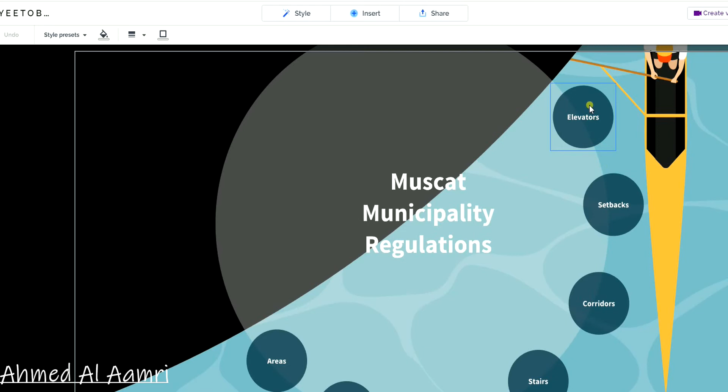So we are going to tackle 7 areas or topics: areas, doors, height, stairs, corridors, setbacks, and elevators. What are the regulations or standards that we are using to obtain our area, and on what basis do I say a room is going to be 10 by 10 or 1 by 2? There is a standard I need to follow for doors, height, stairs, corridors, setbacks, and elevators as well.

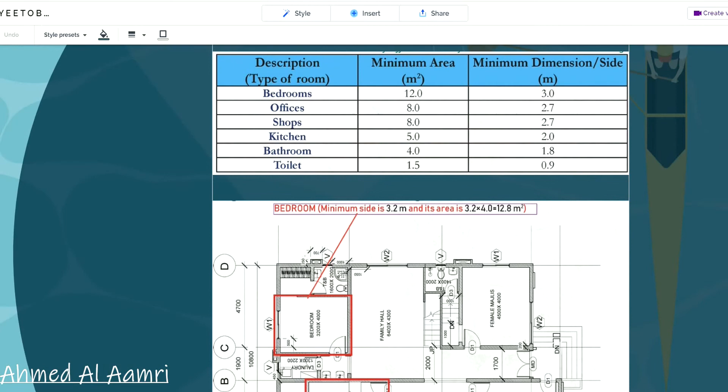Okay, so when it comes to areas, two things are there. This is the municipality, and this is from my own book, but this is a representation of the municipality. You can see it gives a description of a room, the minimum area, and a minimum dimension or side. According to Muscat municipality, the bedroom should have a minimum area of 12 meters and a minimum dimension or side of 3 meters.

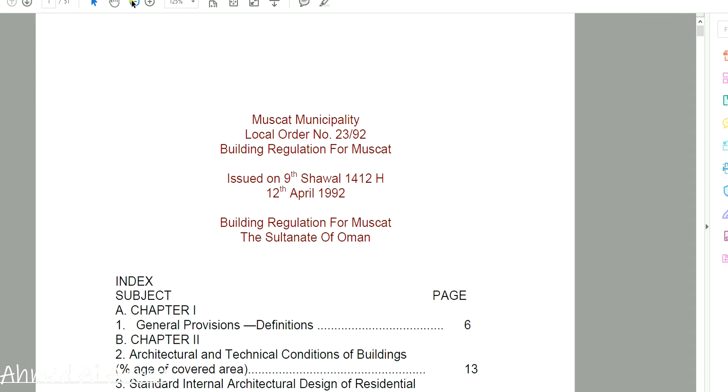And if you go and see the municipality building regulation - this is a building regulation, unfortunately from 1992, it's very old, that's the only thing we have - you can see the bedroom is having a minimum area of something and then the least dimension of something. We need to understand what's the meaning of these things.

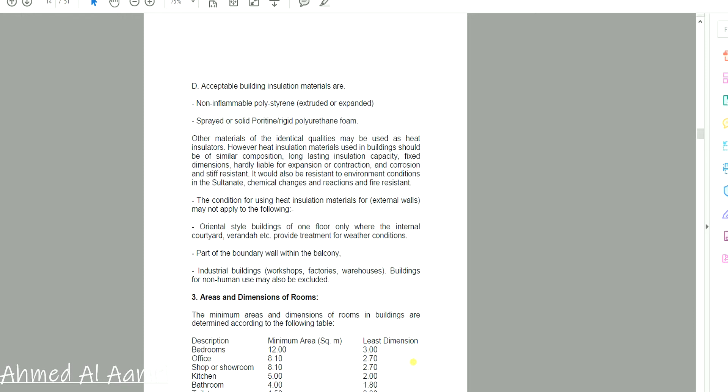So when it comes to minimum area, any bedroom in my plan which has an area lesser than 12 meters, the municipality is not going to approve the plan and will ask you to modify it. For minimum dimension, normally we have four sides, and we need to ensure that none of these four are having a value lesser than 3.

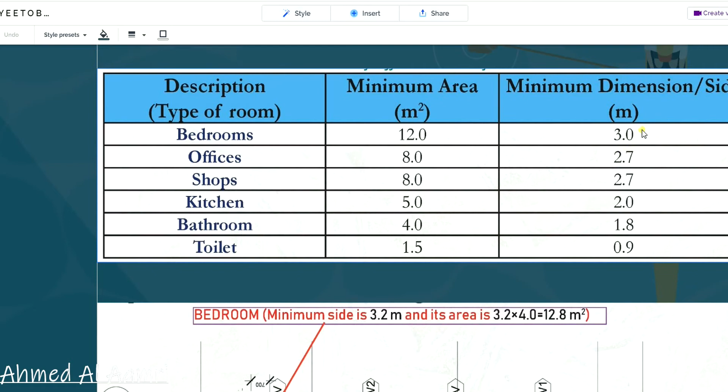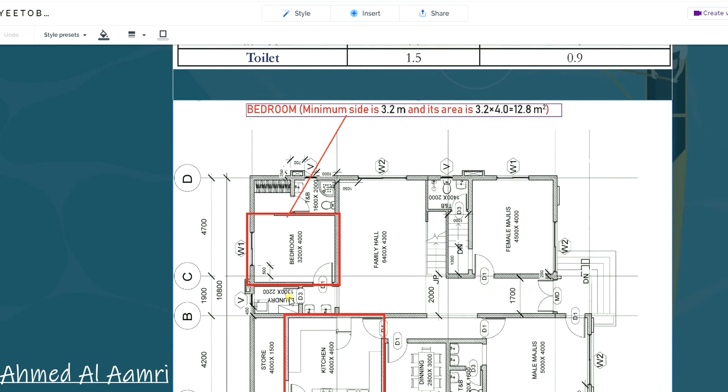So for example, let's take this particular example. Now we have a bedroom in this particular plan, and we are going to verify whether it's according to the law or not. You should be using these dimensions before, not for verification purposes, but just to highlight. So we have a bedroom of 3.2 by 4 meters, and 3.2 by 4 meters is the inner area - not center to center, it's the inner area. So 3.2 is more than the minimum.

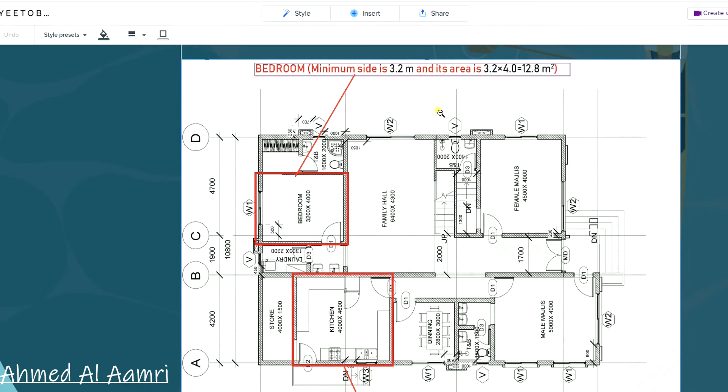Okay, this is more than the minimum, which is 3. So we have a minimum of 3. This bedroom is 3.2, and the area specified is 12. If we multiply 3.2 by 4, we get 12.8.

So for this particular bedroom, I have satisfied whatever is available in the municipality. Later on, when you work as a consultant, you don't want to get your drawings returned back a lot from the municipality. So you need to understand the regulations given by the municipality, and accordingly build your own drawings.

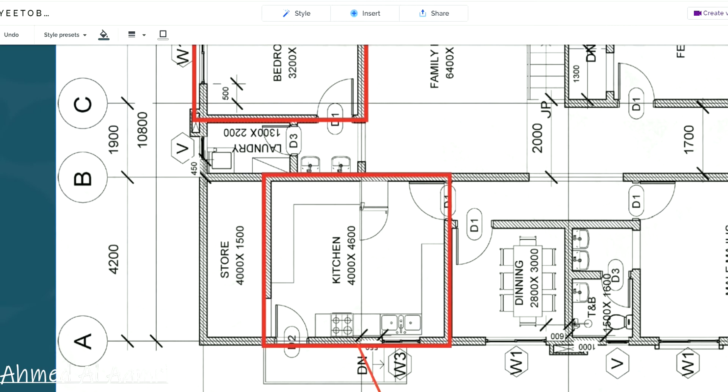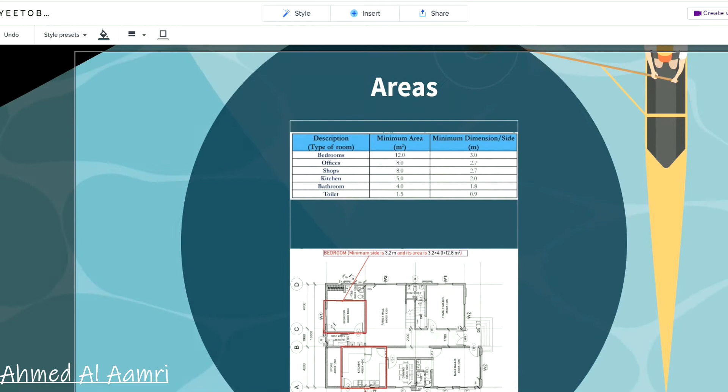The same thing applies for the kitchen. Let's say this kitchen has a dimension of 4 by 4.6. According to the municipality, the minimum area for a kitchen is 5, while the minimum dimension or side is 2 meters. Now 4 meters and 4.6 are more than 2 meters, so we don't have any issue related to the minimum dimension, and we don't have any issue related to the minimum area, since our area is around 18.4. So this is one of the things we need to know from the municipality regulations.

Another thing we need to check from the municipality regulations is what we call doors. Even though it's more of an architectural thing, you need to know it a lot, because many structural things depend on the doors. The positioning of the columns -- you cannot position a column in the middle of a door. So you need to know what the sizes of the doors are, and whether we have the same size of door for all the rooms.

If you notice, when it comes to the toilet or bathrooms, we always have a lesser area. The minimum width according to the municipality for the door is 0.75, and the minimum height of the door is normally 2.1 for any type of door. Normally we start from 0.9. It's a regular value in most buildings -- it goes up for the entrance, and lesser for the bathroom. Now let's look at certain examples we've taken here.

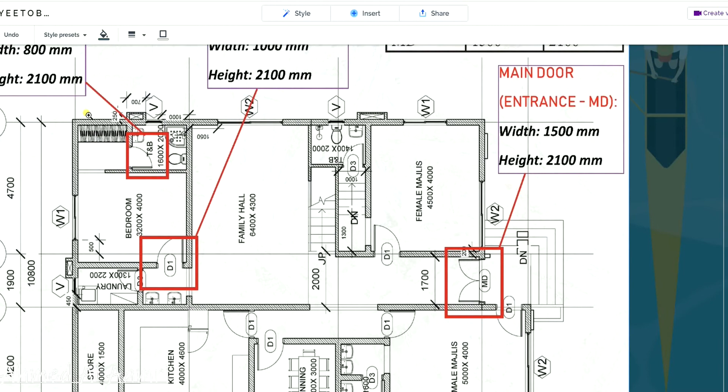We've taken three examples to highlight this, and once again, if you follow the municipality regulations, your drawings will not get returned back. So this is MD, representing main door -- you can see the main door here. The width of the main door is 1.5, while the height is 2.1. So I fulfilled the municipality requirement, because the municipality says the height should be 2.1, and the minimum width for the entrance or main door is 1 meter. I provided 1.5 meters.

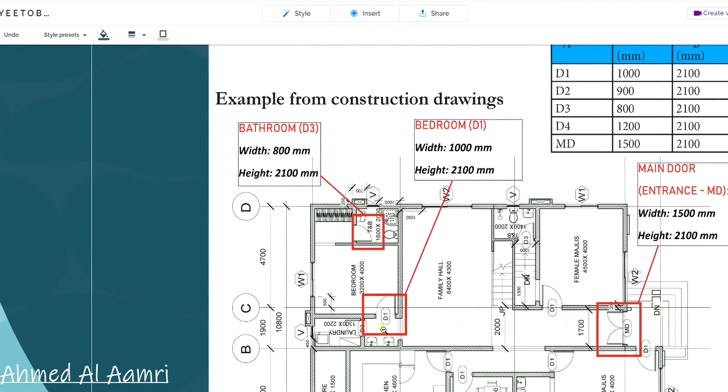Now when it comes to the bedroom, the municipality says a minimum width of 0.9 and a height of 2.1. You can see here, according to D1 in the legend, a width of 1 meter is used with a height of 2.1. The width is more than the required 0.9, and the height is 2.1. You'll notice we always use a height of 2.1, so if anyone asks you in an interview what's the typical height of a door, you should know it's 2.1. You shouldn't say it's an architectural thing you don't need to know -- no, you should know it.

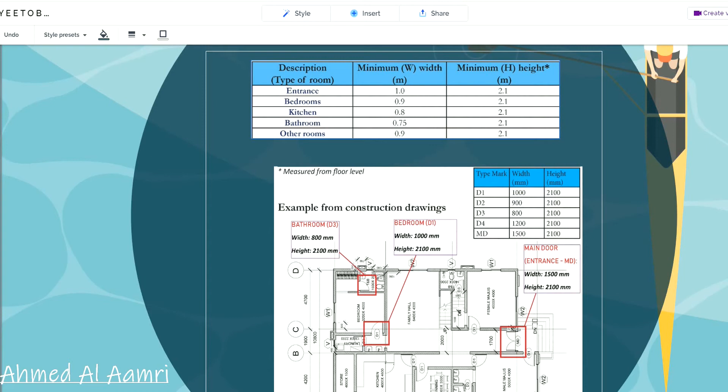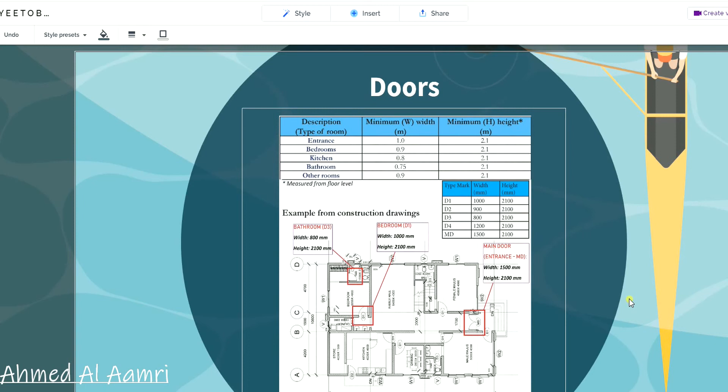Same thing for the bathroom. For the bathroom, we use a width of 800 with a height of 2.1, and here for the bathroom it's 0.75 by 2.1. So according to whatever regulations are given by the municipality, you need to work your drawings accordingly. Normally we don't do this kind of verification -- this is just to show you how to use these values. Normally we build our own drawings according to whatever is available in the regulations.

Normally this will be done by the architect first, and then it will be brought to the civil engineer. But in a lot of scenarios, you might not have an architect to check for you, so you need to know the basic things available in construction drawings.

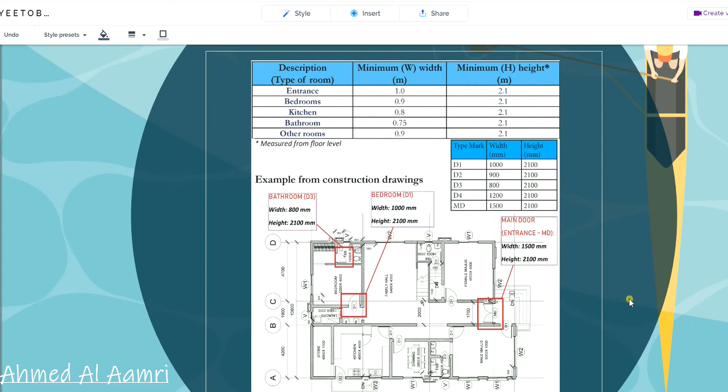Heights. Now we are talking about the different heights, and this is very important for you when it comes to structural design. A lot of architectural students here in the college, a lot of students in the project, they are using heights without knowing from where they have got that height, or from where they are going to say or justify that they have used that height.

According to the municipality, if we are having a residential building, if it's a one-story building, or if it's a ground floor, we can go for 3 meter up to 4 meter. I cannot go and have 4.2 meter for a single story building, or even if it's a ground floor. It should be from 3 to 4 meter. I should not exceed that value, and I should not be lesser than 3 meter.

Lesser than 3 meter, it means because of the slab, because of the beams. Once again, the height is measured from the slab to the upper slab. So it means that you need to reduce the slab thickness, you need to reduce the beam thickness. It means that you have a very small clear height. You will end up having around 2 meter or 1.8 meter that you cannot use if you are using something lesser than 3 meter.

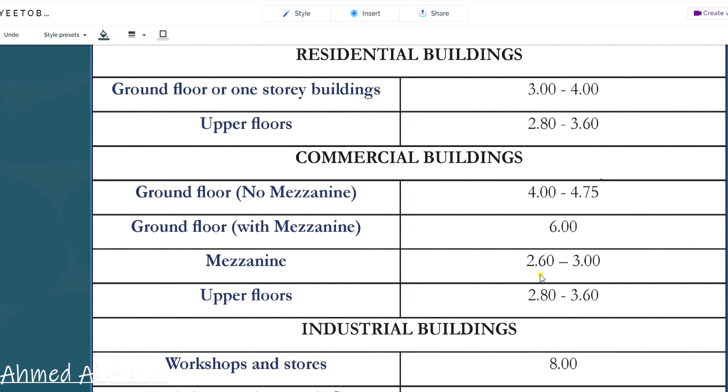For commercial building, we have ground floor with two options: one with mezzanine, another one without mezzanine. If it's with mezzanine, then it's going to be 6 meter, mezzanine included. If it's without mezzanine, only ground floor and then first floor directly, then you're going to have it from 4 to 4.75. Mezzanine, if it's separate, 2.6 to 3 meter. It should not exceed that.

Upper floor, if you're going to use, I mean first floor, second floor, third floor, typical floors are going to be from 2.8 to 3.6.

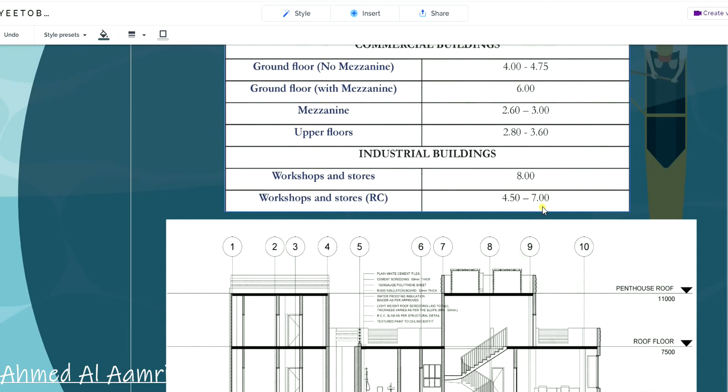In case of industrial buildings, if you are talking about a workshop, if it's a steel structure, then you need to go for up to 8 meter. You cannot go more than 8 meter. If it's an RC structure, it's from 4.5 to 7 meter. You cannot exceed 7 meter. And once again, workshop for RC is not recommended. Normally we have

most of the structures for the workshop, most of them are going to be steel structure only. And one information when it comes to steel structure: all the consultancies here in Oman, they are doing only concrete work.

They are only doing concrete design, they don't do steel design. Even if you take it done by your consultancy and take it to the municipality, the municipality will not approve it. The municipality will ask you to take it to a manufacturer or a contractor, a steel contractor or a steel subcontractor who is going to do the design. So the design of steel here in Oman is done by the steel company, not by the consultancies.

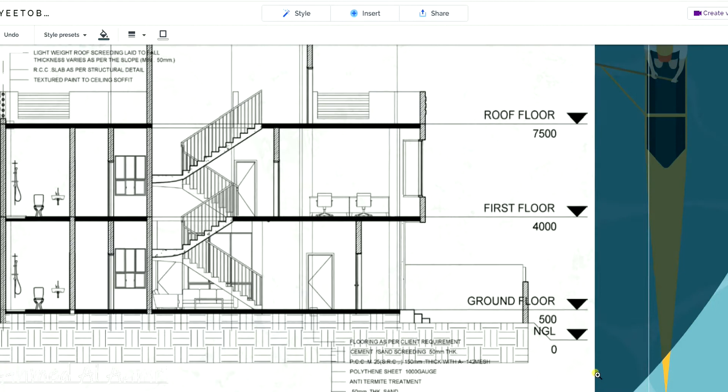The consultancies are doing concrete design or pre-stressed concrete as well. Now you can see here we have natural ground level, ground floor, and then from the ground floor to the first floor we are having 4 meter.

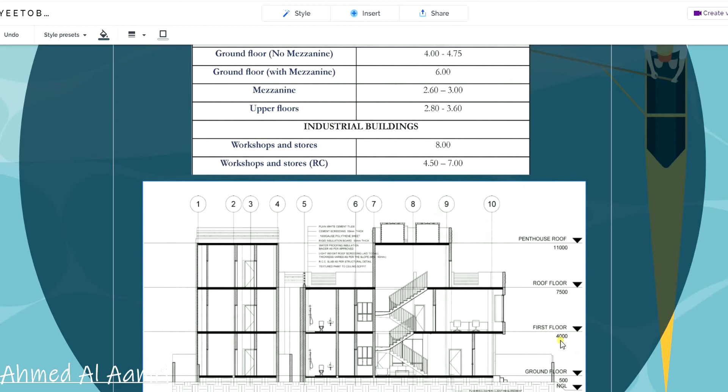So this is fulfilling whatever is available. Of course, this is a residential building. For a residential building, according to the municipality, we should not exceed 4 meter. So we have the ground floor for up to 4 meter. The roof floor, so the second floor, is going to be 7.5 minus 4, which is 3.5. So once again, 3.5 is within the limit specified by the municipality, and it goes the same for the roof.

So first floor and then the roof floor. Once again, it's very important for me as a civil engineer to know if I'm going to design a warehouse, what's the maximum height that I can go for. If I'm going to design a commercial building, what's the height, and then for a residential building, what's the height to be used.

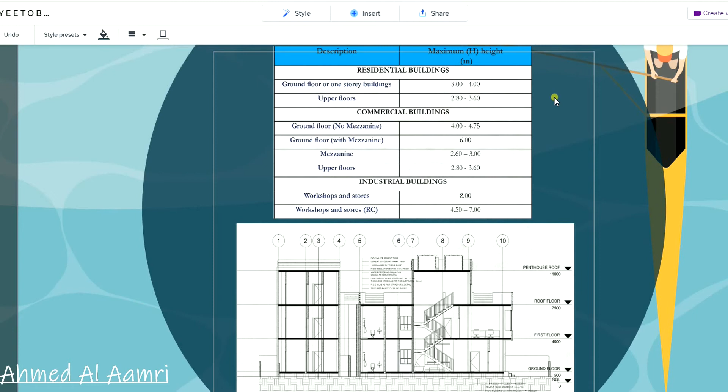Okay, going for the next point, which is stairs. A lot of things are here. We are going to first understand the concept of stairs.

I don't think that you have taken anything related to stairs in your college studies. You need to understand them. So we have different components of stairs. We have something called rise, and we have something called going or tread. Okay, so rise and going, different terminologies. The thickness of the slab for the stair, we call it as a waist. Okay, so the thickness of the slab for the stair, we call it as a waist.

We have a landing here. It can be supported by beams or it can be supported by walls. So one beam here, another beam here, or it can be supported by wall on this particular side. Okay. Now, why this is very important for me, because there are certain things that I need to follow according to the municipality. One of them is the number of rise or the number of steps in the stair. Another thing is height of the rise. Another thing is width of the going.

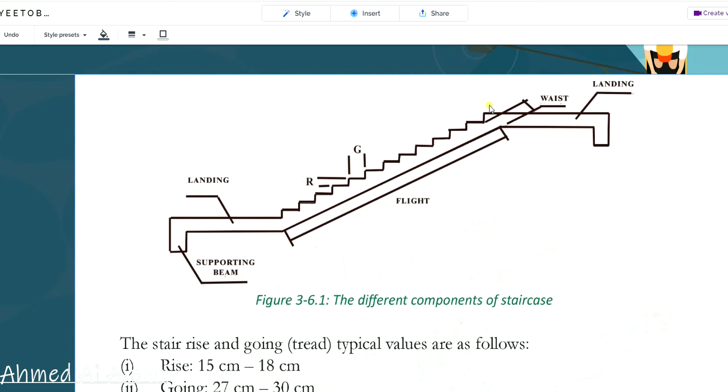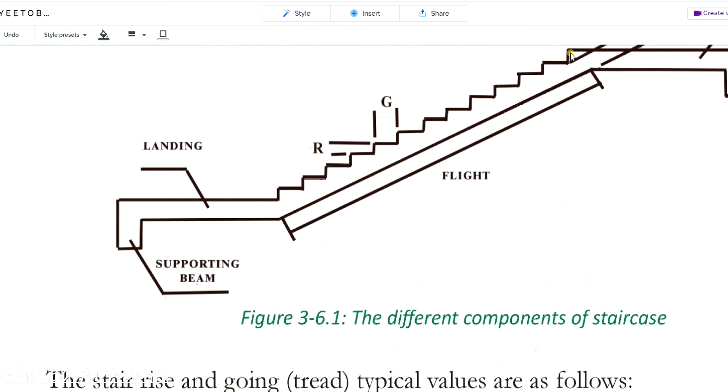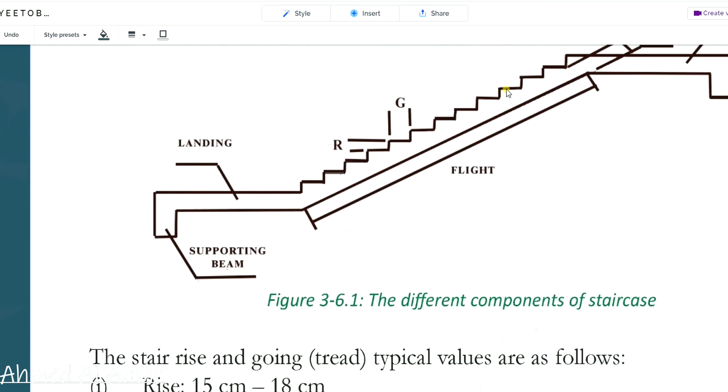Okay. Now if you go and notice here, and this is a very important question normally asked in the interviews: what's the relation of the number of risers to the number of treads? If you can see here, we have first riser, second riser, third, fourth, fifth, sixth, seventh, eighth, ninth, 10th, 11th, 12th, and then 13th. We have 13 risers. How many goings are there? First going, second going, third, fourth, fifth, sixth, seventh, eighth, ninth, 10th, 11th, 12th. The last one is not considered to be a going anymore. It's considered to be a landing.

So if they are asking you what's the relation of risers to goings, you can say that the number of risers is always going to be the number of goings plus one. Okay, so always the number of risers is more than the number of goings by one. Why? Because the last one is not considered to be a going; it's considered to be a landing.

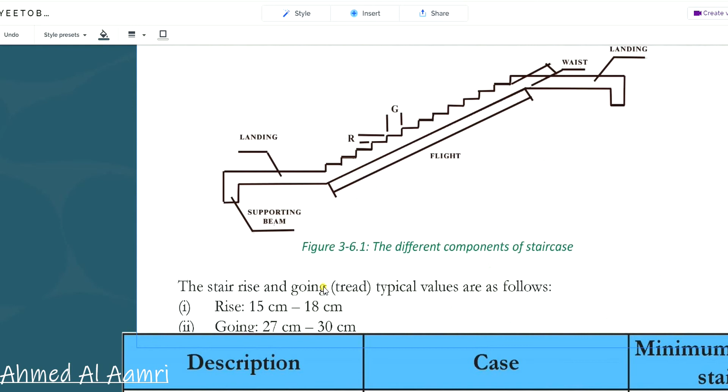Okay. Now, according to the municipality, there are certain things that you need to follow. We need to have the height of the riser to be within 15 to 18 centimeters. It shouldn't be less than 15. It shouldn't be more than 18. Being more than 18, it's too much. You will feel that it's hard to use this particular stair because it's not easily used. And the going is going to be between 27 to 30. If the municipality gets your stairs and you are not within these limits, your full drawing is going to be returned back, and you will be asked to change it.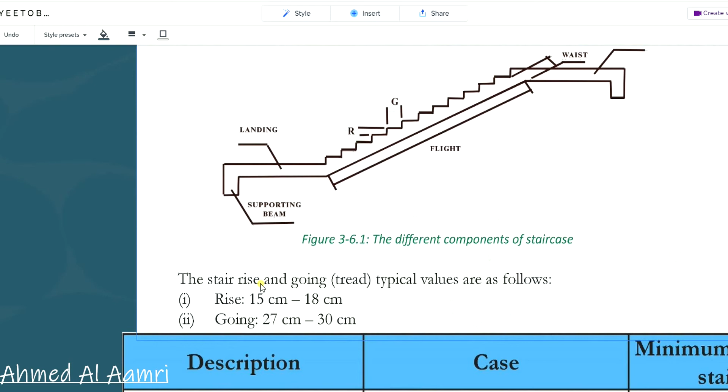Now, if you keep making a lot of mistakes and sending them to the municipality each time, or if they see very huge or basic mistakes like these ones, normally they will cancel whatever you have submitted, and then you need to pay for the second one. For each time that you send your request, you need to pay around 20 riyals. So they will cancel it, and then you need to pay. If they keep seeing a lot of issues coming from your side as a consultant, then they might decide to cancel your consultancy.

Okay. Anyhow, the second point is going to be about the number of staircases in a building. Once again, the municipality has specified, if you have a single floor, you can have either none or one. There is no specification related to single floor. If I have a single floor, either it's going to be none, I don't have any stair, to go to the roof you can have an outside stair, or you can have one. Now, if it's more than a single floor, at least you have one.

Now, when to say that I need to have two? I need to have more than one in case I have a floor area more than 500, or a total built-up area more than 1,500. So let's say I have a block where the floor area is 600. I have two stories, 600 for the ground floor, 600 for the first floor. Then one is not going to be enough for me. Okay, one stair is not going to be enough.

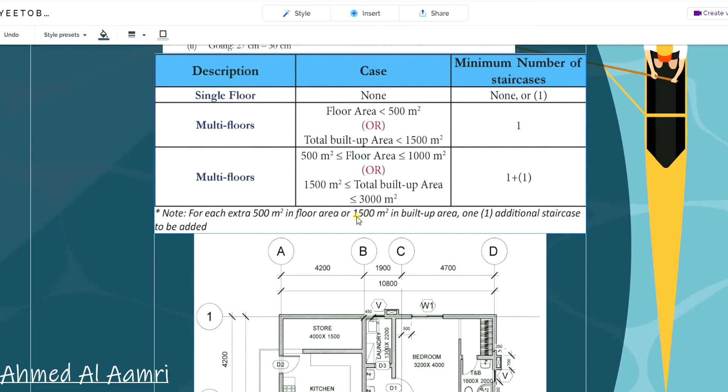Let's say, for example, I have a floor area of 1500. It means that I'll have one for the first 500, a second one for the second 500, and a third one for the third 500. So I'll be having three stairs, and it goes on. Okay. Now that's related to the number of stairs. After that, we are going to see the width of the stair.

So first we discussed the different components of the stairs. We learned the meaning of riser, going, tread, waist, landing. We learned on what basis we specify whether I have one stair or two stairs. After that, we are going to see on what basis I determine the width of the stair.

So it says, if it's a residential building, and you are talking about three units in a floor, let's say three apartments, since it's residential. So 3 apartments in one floor, 12 apartments in all floors. Then the width is going to be between 1 to 1.1.

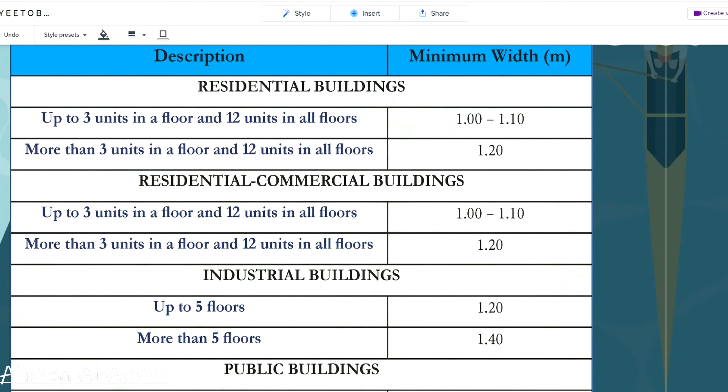So one basic thing that we should know: it depends on the number of units and the number of people using the building to decide how many stairs and what the width of the stair is. And these are examples. For example here, you can see the floor dimensions, this is 10.8 and this is 16.7. Your area is around 150 to 200, less than 500 meters square. So for this particular building, I don't require more than one stair, because if it's less than 500, one stair is going to be sufficient.

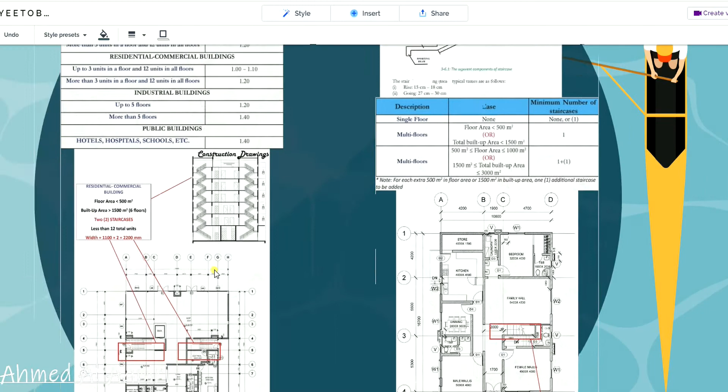So once again, if it's less than 500, then one stair is going to be sufficient. What's the width of the stair? The width of the stair is given to be 1000. So 1000 here, another 1000 here, which follows the width shown in the municipality requirements. Another case is here. You can see that I have ground, first, second, third, fourth, fifth, sixth, and it goes on.

You can see here 6 floors are there. Floor area is more than 500, or total built up area. Okay, floor area is lesser than 500, but total built up area is more than 1500 because it's 6 floors. Total built up area is the addition of all floors together. Since it's 6 floors, it means that the number of users are going to be more. So one stair is not going to be sufficient. I need to use 2 stairs in this particular example.

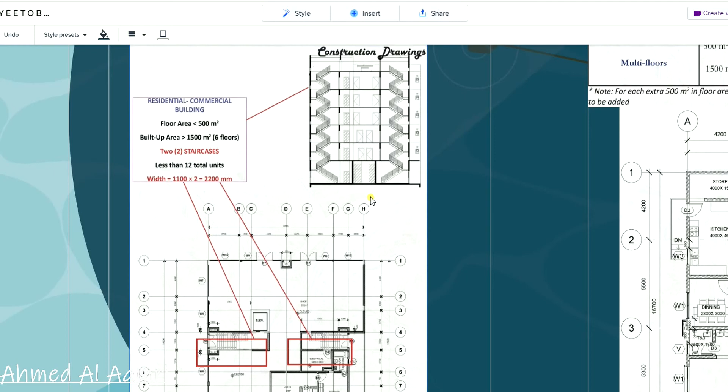What's the width of the stair? It depends on the nature of the building, whether it's residential, commercial, industrial, or public building. So once again, we need to know first what's the floor area, what's the built up area, and accordingly we are going to specify the number of stairs. After specifying the number of stairs, we need to see the nature of the building, whether it's residential, commercial, industrial, or public, to decide the width.

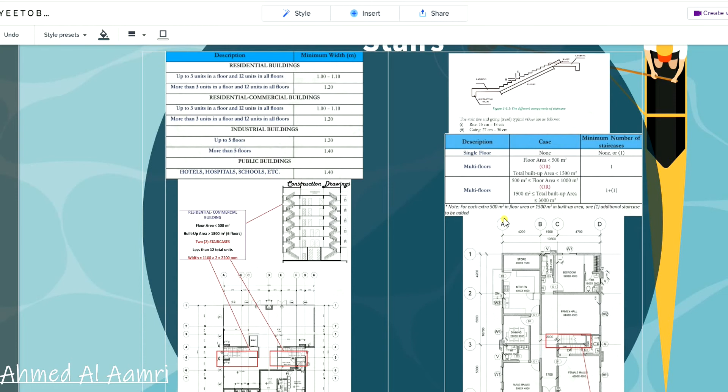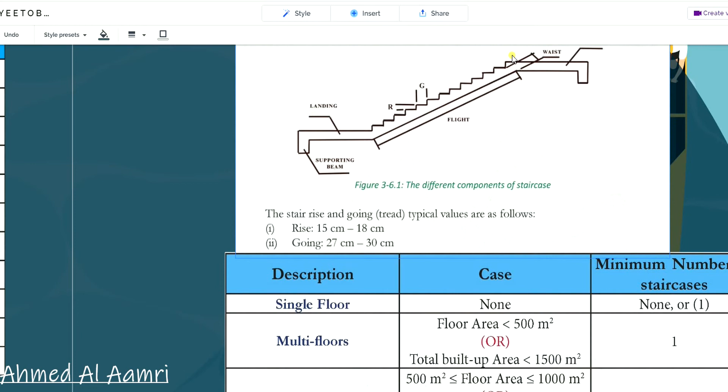Okay, and once again, there is one thing that you need to note. One question might be coming for you: what's the maximum number of steps for a stair? One line stair, it's going to be 13. You cannot have more than 13 according to the municipality. If you go more than 13, then your design is going to be returned back. Okay.

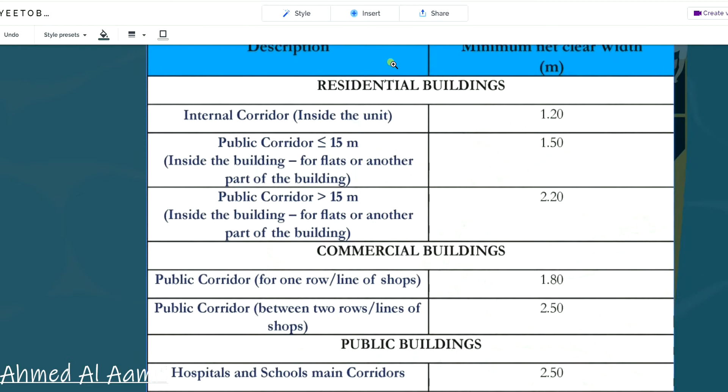After that, we are going to go for the corridors. And once again, I need to know what are the specifications from the municipality related to corridors. For residential, we have internal corridor, we have a public corridor, and then we have commercial buildings, public buildings. It depends on the number of users. Residential, normally the number of users are less, so the width is going to be less. Commercial, number of users is more, so normally the width is more. Public, a lot of users, so normally the width is going to be more.

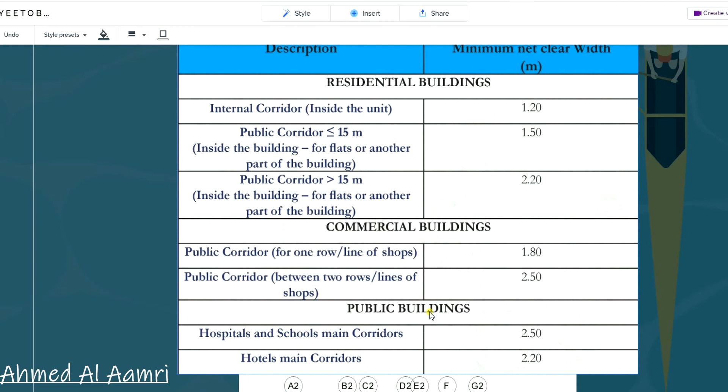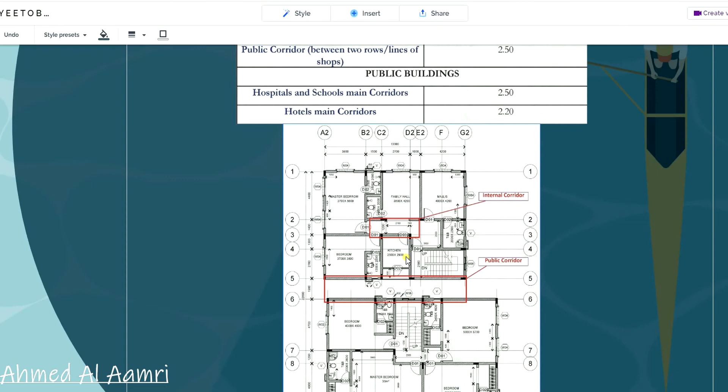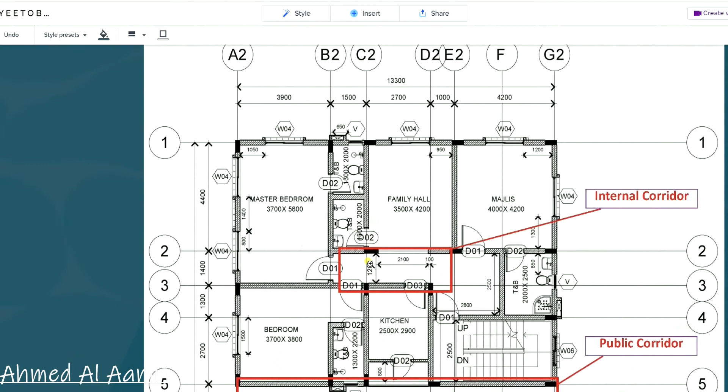Internal corridor is between the rooms themselves. Is it clear? So internal corridor is inside the entity. Public corridor is between the entities. So normally when it comes to a regular plot, we are dealing more with internal corridor. So according to the internal corridor, you need to see how much. Here, for example, it's 1.2. You can see internal corridor inside the unit, it's 1.2.

Okay, so that's related to corridors. You need to understand the meaning of internal corridor, public corridor, and you need to understand the nature of the building, and accordingly you can specify the width of the corridor itself.

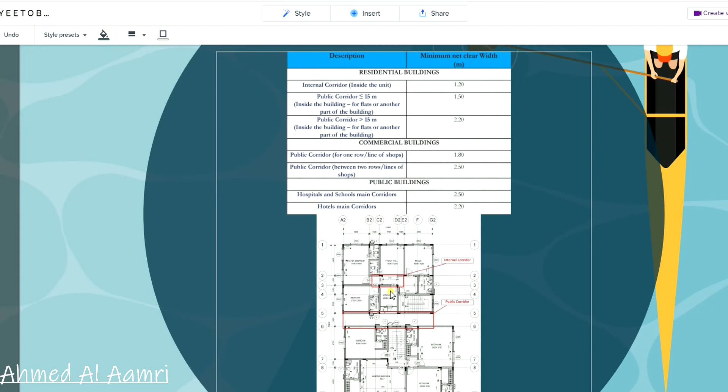Setbacks, this is a very important point for tomorrow's lecture, which is croquis. So we are going to learn how to read the croquis tomorrow. Now, according to the municipality, there are certain clarifications for setbacks.

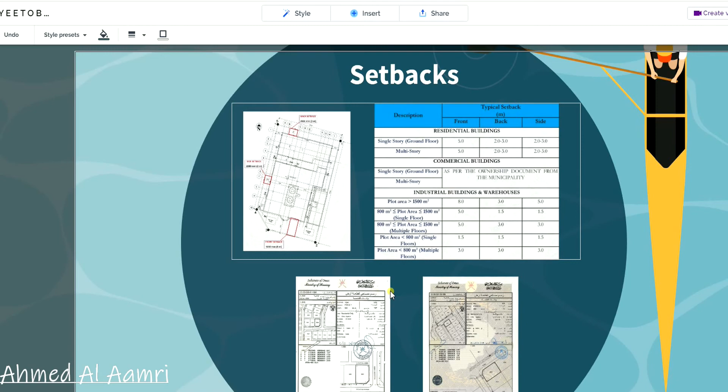الارتداد, or setback, is from the structure itself till the last part of your boundary wall. Okay, so certain things have been given by the municipality. For example, it gives you typical setbacks. You can see here we have different setbacks.

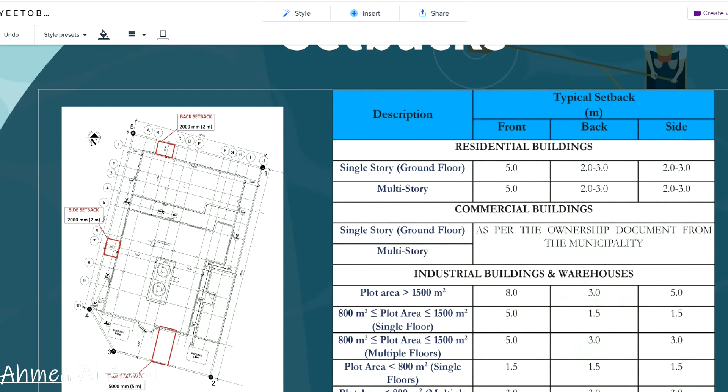This is back setback. These are sides. This is first side. This is second side. And then we have here front setback. So these are the setbacks, أو الارتدادات.

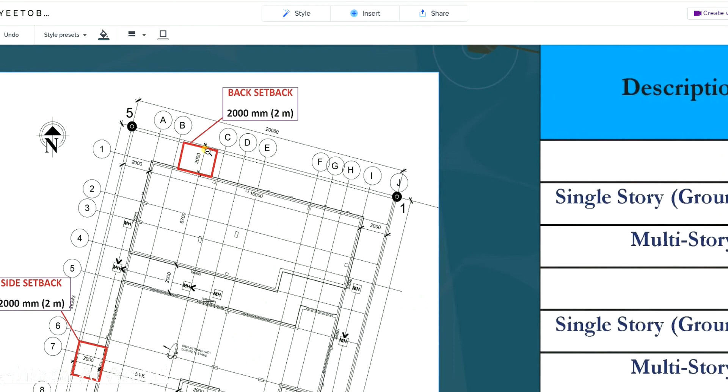Okay, and you can see here in this particular example, the back setback is 2 meter, the side setback is 2 meter, and then the front setback is 5 meter here. Okay, so it means that we have fulfilled, if this is a residential building, the 2 meter for the back, the 2 meter for the side, and then 5 meter for the front.

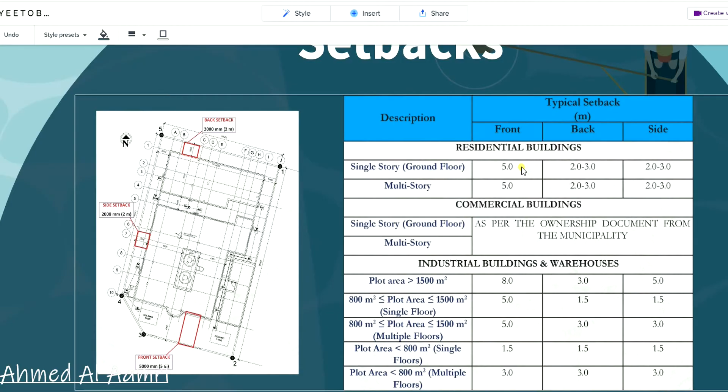Normally there might be a clash with the croquis. Whatever you need to follow here in terms of the setbacks, your final reference is going to be the croquis. It's not going to be the ministry. There might be a small change between them, but your final decision as a designer is going to be based on the croquis itself. So if we go for the croquis, these are two samples of croquis. You can see area, number. We are going to discuss it in details next session or tomorrow.

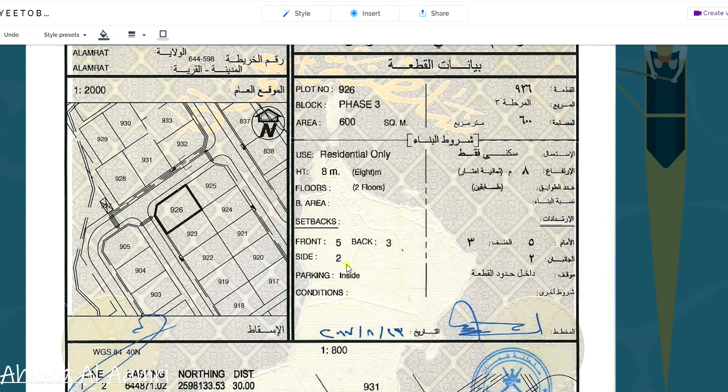And now you can see that they have mentioned clearly the setback. It says for you for the front 5 meter, for the back 3 meter, for the side 2 meter. It means here I cannot go from 2 to 3 meter for the side. I cannot go for 3 meter. Even the municipality says 2 to 3, but according to the croquis, I have only two. So the final reference is going to be the croquis.

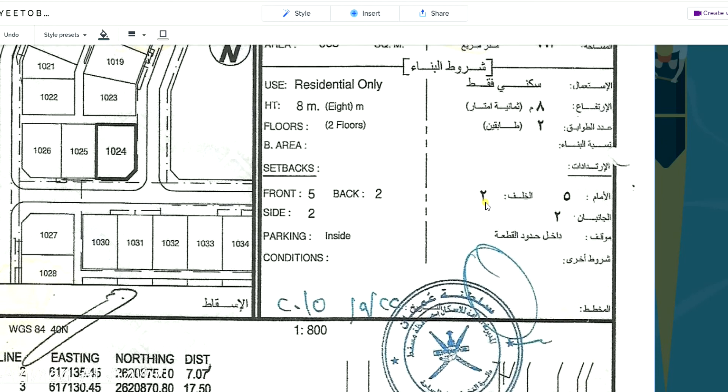Okay, and then the second one is this one, and once again here you can see 5 meter, 2 meter for the back, 2 meter for the side. The parking is inside, if you can see, that's why we are giving them 5 meter for the front. I cannot go and use three even if the municipality says it's 2 to 3, because the final decision is going to be according to the croquis.

Tomorrow we are going to learn the different things in the croquis. We are going to learn easting and northing. We are going to learn how to plot the plot in AutoCAD, how to find it in Google Maps, because Google Maps is using a different system of coordinates, and AutoCAD is using a different system for coordinates. So if somebody is asking you to draw the plot in the CAD, you should know how to draw it. If somebody is asking you to find this particular plot according to Google Maps, you should know as well.

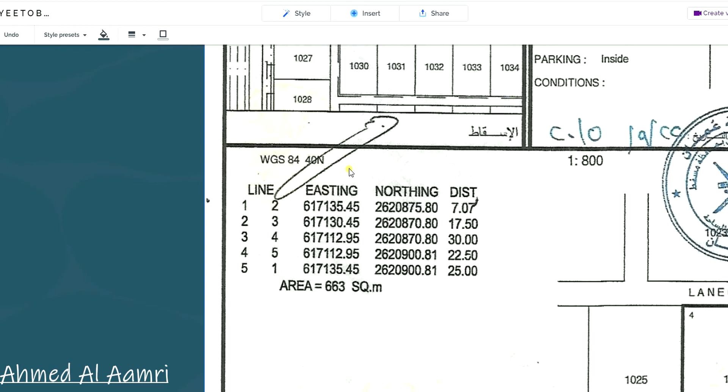Last thing, we are going to go for the elevators. And elevators normally, according to the municipality, can be available in a building if it's more than 3 stories. Okay, if it's 3 stories or lesser, then it's optional. It depends on the owner of the building. If the owner of the building is having a good amount of money, and he is having 2 stories, and he wants to have a lift, that's up to him.

The main functions of the elevator or the lift are two. One is for the ease of transfer vertically from one floor to another floor. Second thing is to resist the horizontal forces. That's the main thing for you as structural designers, as civil engineers.

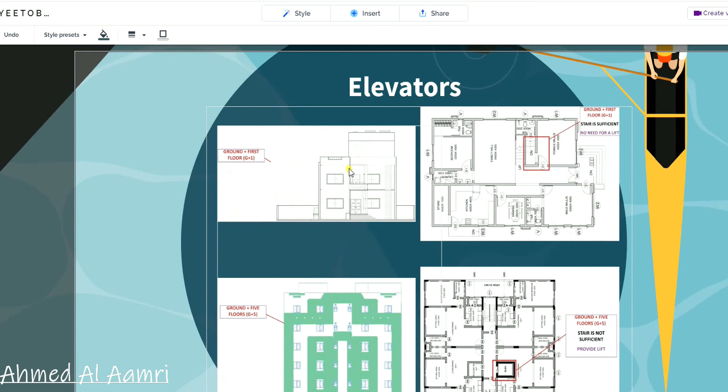This is a ground plus first. You can see ground plus first, and then we have a roof here. And you can see, if it's ground, first and roof, there is no need for me to provide a lift. So this is the plan. I don't need to provide a lift because there is no requirement. It's equal or lesser than 3 in terms of number of floors.

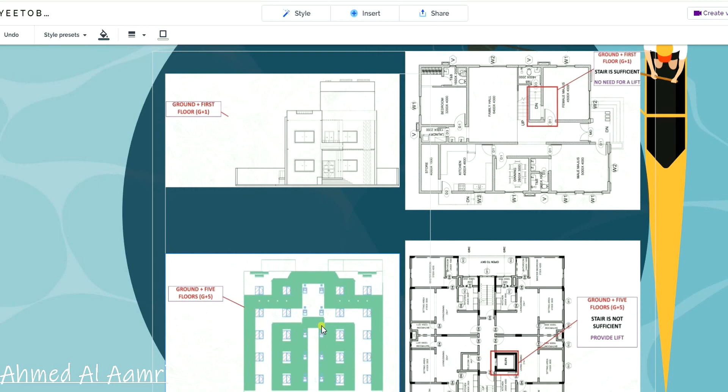For the second example, we have ground plus 5 floors. So ground plus 5, 1, 2, 3, 4, and 5, and then we have the roof here. Since it's more than 3 stories, then for the ease of transportation from a certain floor to another floor, and for resisting the seismic and wind load, we need to provide an elevator, or whatever we call it as a lift, or what we call it structurally as a core wall. Okay.

So by finishing the elevator, I have finished samples of the Muscat Municipality regulations. There are a lot of things still in the Muscat Municipality regulations. You need to know them. I'm not asking you to memorize them, but you need to know them. If somebody is asking you in the interviews what's your reference, which will help you to find the areas or whatsoever, you need to know that there is a reference, which is Muscat Municipality, that is going to be helping you for your design.

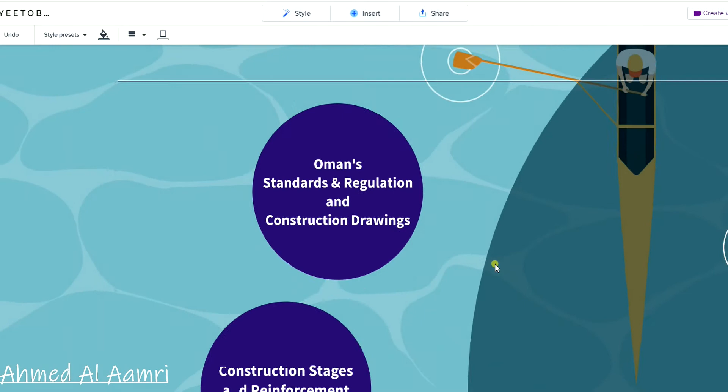I have finished today's lecture. Since there are a few minutes left, tomorrow whatever we are going to have is going to be related to construction stages and then structural layout. So we are going to learn, as I told you, we are going to take different krookis. We are going to learn how to implement them, how to draw them in CAD, how to draw the plot in the CAD. I'll teach you how to draw the plot automatically in the CAD. So it's a matter of copy and paste. You don't need to draw a line and whatever. No, you can just copy and paste a certain text, and then the whole geometry of the plot will be drawn for you. And then we're going to use Google Maps, and I'm going to show you what's the difference between the different systems that are available.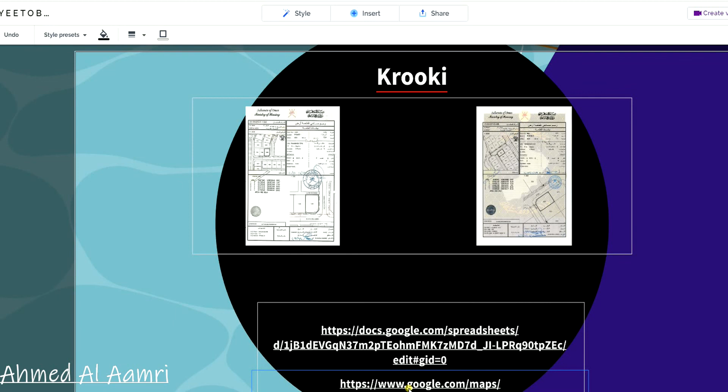We are going to take construction stages. So we are going to learn by pictures what are the different stages of construction, from one to another. So you should know what are the phases or stages that you are going to tackle, because these are very important for you in construction. Whether you are a contractor or a consultant, you should know what are the major steps, like for example, grade, slab, column, staircase, beam. What are the steps that we need to follow? So this is a pictorial part. We are going to follow how to construct a building from the beginning till the end.

And then the last part is structural layouts. So we are going to take different types of layout. But before going to the slabs layout, beams layout, columns layout, and foundation layouts, we are going to learn typical things which are important, like what's the meaning of a hidden beam, what's the meaning of an inverted beam. You have heard a lot about regular beam or drop beam. What's the meaning of an inverted beam? What's the meaning of a sunken slab? All of these terminologies are there. And then we are going to go for the layout. We are going to understand what is inside the layout, how to read the schedules, what's the meaning of short, long bars, what's the meaning of extra top, extra bottom. So all of that we are going to learn in tomorrow's lecture.

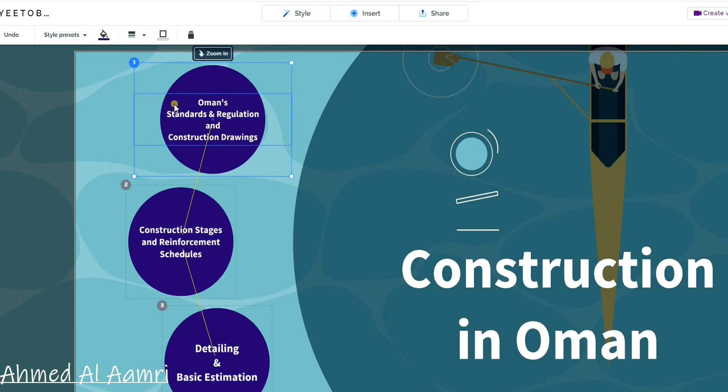Okay. So just to recap whatever we have taken today. We have taken the most important documents that we need to know as civil engineers. These are normally not taught in the colleges. Even when we graduated from the college, nobody taught us, even in the other colleges. Nobody is teaching them. But these are a good preparation for you, for the interviews and then for the jobs later on. This will give you an extra advantage compared with the other competitors from the other colleges.